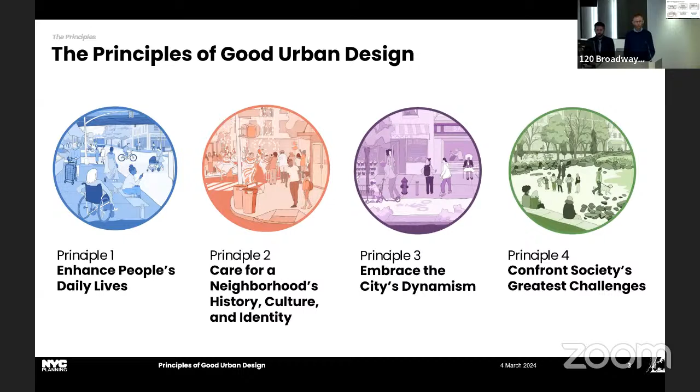Our process took several years and included meeting with community boards, including all 5 borough boards, which helped us spread the word on the interactive website we created, where we heard from over 1,500 New Yorkers from Staten Island to City Island on ways the principles could be better. We had public events like Earth Day to get on the ground, workshops with the AIA, American Institute of Architects, and design and planning professionals to better understand how principles can collectively improve design outcomes, and connected with interagency partners to find synergies among city agencies. We also held a roundtable with developers to understand how good urban design can make more valuable projects.

We heard a lot of great questions from each of you last January, a few of them highlighted here. Most have been addressed with the guidebook, including grounding the principles with specific objectives and real-world examples. Some are spoken to, like the relationship between other codes and regulations, as well as other agency guidelines. And others we'll talk about in our path forward, which speaks to further integration into our processes here at DCP and additional resources for New Yorkers.

Lastly, the primary goals of the Principles Guidebook are to help set expectations that align with a vision for the city, shape better design outcomes through a shared approach, demonstrate how good urban design is more than just aesthetics, and bring more people into the conversation of planning and designing the city. I'll now hand it over to Ryan.

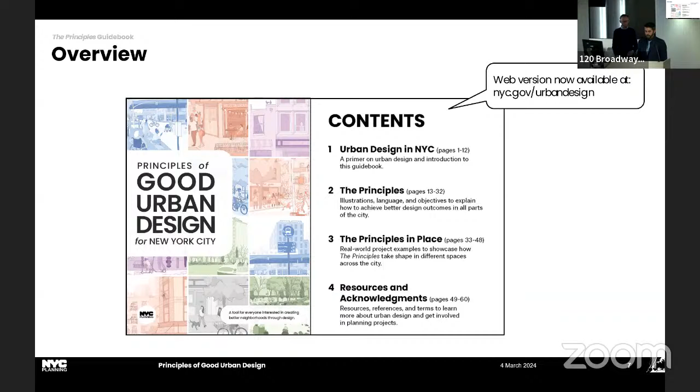We'll take a brief dive into some of the material from the guidebook. Chapter 1 is about justifying the need and use cases for this guidebook. We answer the question, what is urban design in New York City?

Highlighting the importance of thinking about how people experience our city, and how urban design not only supports an attractive city, but a city that is functional and dynamic, a city that feels safe and inclusive.

Urban design requires thinking across a variety of scales. Good urban design not only improves your experience when you're moving down the sidewalk, but it also identifies strategic opportunities for improving economic, social, and environmental conditions at the scale of a block, a neighborhood, the city, and even our region, ensuring that the city is well coordinated, adaptive, and that it performs for our diverse population.

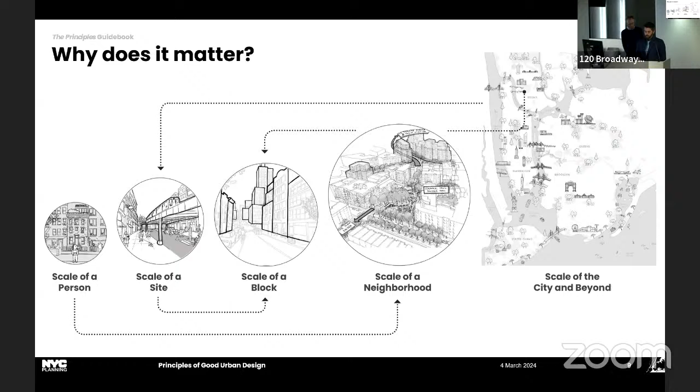The principles of good urban design are a shared set of values and goals to help New Yorkers have constructive conversations about the future of our city. They guide people to think beyond hyperlocal challenges and identify ways that each project can lead to better neighborhoods and a better city. Whether you are a proud resident who attends community board meetings, a parent who wants to shape a better future for your children, or someone who already has experience in planning and design, we hope that this guidebook will have something for you.

The guidebook is a shared tool that can be used in a variety of ways, such as engaging at the local level, or guiding development teams in their design and planning process, or better integrating urban design in our city's policy goals. The guidebook provides actionable goals to help people bring each of these principles to life. We are going to walk through each principle and use an example project to highlight how the objectives play out on the ground. Keep in mind that this is only a Cliff Notes version of what's in the guidebook.

First principle: whether it's a sidewalk that is wide enough for rush hour crowds, storefronts that enliven the street, or a plaza that has comfortable chairs to relax in, details and dimensions impact how people experience the city. Principle 1 is about sharing design strategies that can improve safety, accessibility, comfort, and beauty.

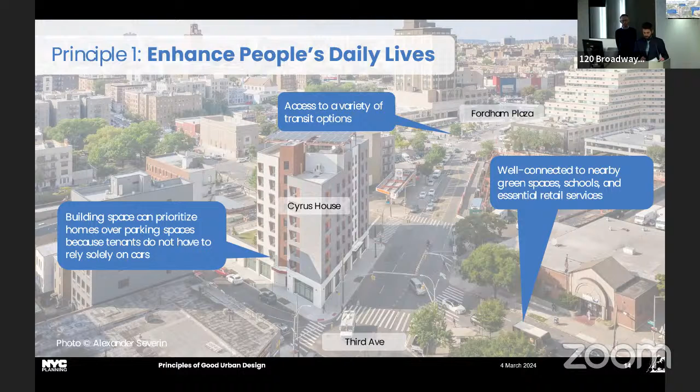On the ground floor of the building, a mix of commercial and residential uses wrap the three frontages. Large storefront windows and multiple building entries make the space feel vibrant and inviting. The building scale is also broken down by changes in height, recessed walls, and a change in materials. These architectural details strengthen neighborhood beauty and promote walkability.

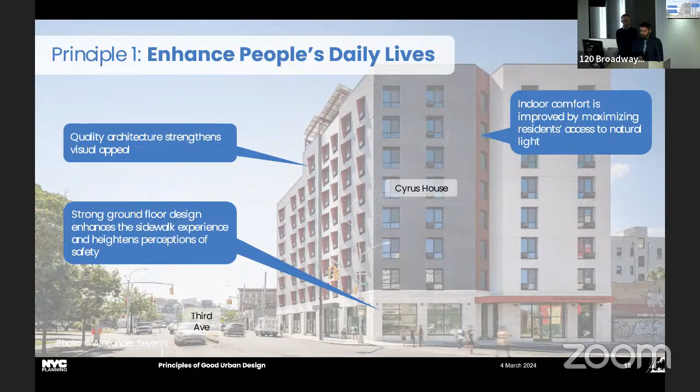Good urban design, like planning, involves a rigorous process of investigation, engagement, and analysis to support thoughtful outcomes. Principle 2 shares actionable goals to strengthen the planning and design process, ensuring that new projects are shaped by the community and informed by existing networks, assets, and identities.

Collaborating with local leaders, from longtime residents and business owners to parents with young children, helps bring clarity to community needs. During hands-on meetings in East New York, Cypress Hills, and Ocean Hill, components of the East New York Neighborhood Plan took shape as community members spoke out about their priorities.

The East New York neighborhood planning process was iterative. Similar to a design process, many interests, ideas, and objectives were shared from a variety of perspectives. Good urban design synthesizes this information by drawing out maps and diagrams to better understand the nuances of neighborhood spaces and their relationship to larger networks.

This drawing was created to visually communicate where there are opportunities so we can involve the right people to identify solutions.

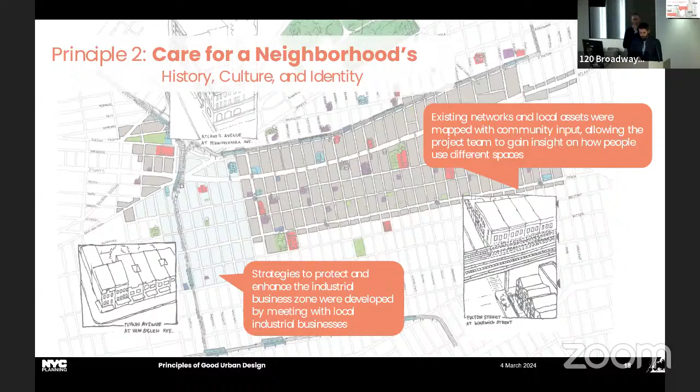Iterative modeling is also a big part of neighborhood planning work. Good urban design analyzes how building form can respond to a site's surroundings, like street width or open space adjacencies. It identifies where public realm improvements are needed to support land use changes, and where land use can help activate the public realm.

New York is a dynamic and vibrant world capital. Good urban design embraces that spirit and rhythm that is characteristic to our neighborhoods. Principle 3 shares objectives for blending old and new, along with ambitions to spark creativity and innovation, and ensure that spaces are designed to celebrate public life.

When developing city-owned land, we have a unique opportunity to shape site programming and design through an extensive outreach process, like the one led by HPD for Sendero Verde in East Harlem. The built outcome includes programming that attracts residents, students, workers of various professions, and visitors, adding energy and new experiences to the neighborhood. The elevated courtyard contains a variety of spaces that diversify East Harlem's public space network.

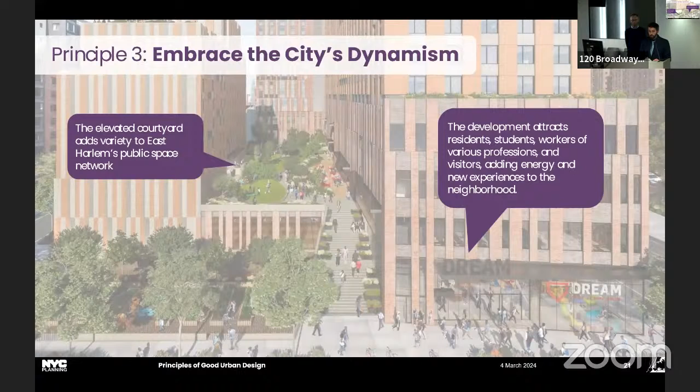The site plan arranged buildings to maximize sunlight within the open space, to reintroduce community gardens, along with flexible open spaces. Community uses and educational facilities are located in the lower floors, which open directly into the plaza space. This activates the public space and provides people with convenient access between indoor and outdoor areas.

Lastly, our city faces many challenges from climate risk to the housing crisis and social inequities. Principle 4 puts forth actions to help each project make progress towards a built environment that is healthy, inclusive, and adaptive, and processes that embrace diversity and facilitate mutual understanding.

Principle 4 cannot necessarily be captured in a single project, but this example along the Gowanus Canal shows how certain objectives come to life. 300 Huntington sets the stage for the kind of development and quality of open space that will be created along the canal. It is unique in that its non-residential use will bring a variety of different people to the waterfront, providing opportunities for social interaction.

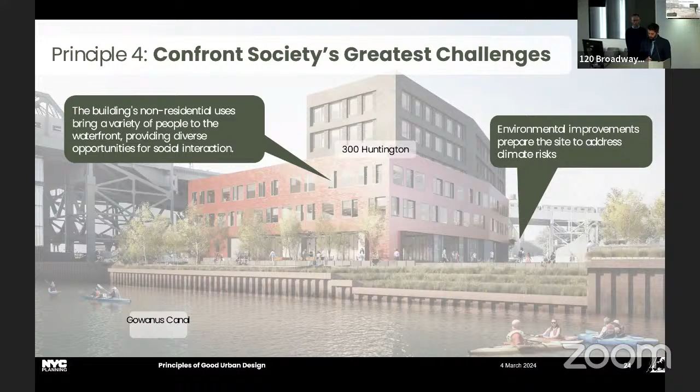The development includes environmental improvements such as site remediation, techniques to capture stormwater, and a dynamic esplanade design that addresses flood risk. Inviting seating areas and a variety of social spaces encourage people to enjoy their time in this public space. They will be surrounded by a diverse array of native and aquatic plants that can thrive in this environment and help restore the canal's local ecosystem.

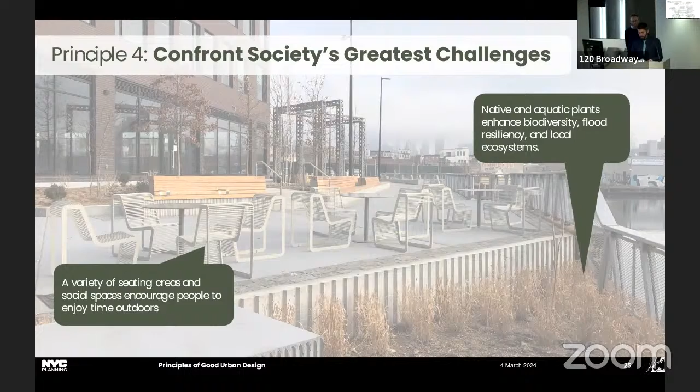The guidebook also includes resources to help people who want to participate in shaping the future of their neighborhood. This example includes questions that a community member could pose when a new development is proposed in their neighborhood. The guidebook includes a step-by-step user guide to help people determine when and how to get involved in various types of planning and design projects.

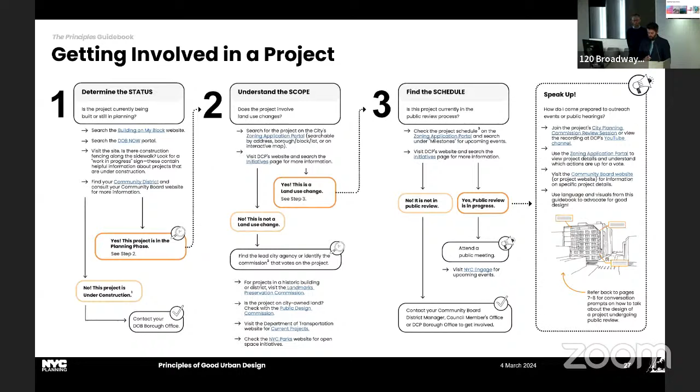And since the principles of good urban design are only a component of delivering quality to all New Yorkers, the guidebook links out to other design resources where people can explore specific topics within the field.

Thank you, Ryan. So, our path forward. Tonight we've got an event at the Center for Architecture, which is sold out. A diverse group of speakers will be there to show how their work exudes these principles.

We'll also be crowdsourcing additional feedback for other case study examples to include, as well as ways in which we might make these principles more actionable and grounded in work.

We envision doing more continuous outreach, of course. We want to be mindful of our community board members and the sheer amount of work that they're reviewing now, but we do think it's important to circle back with them and share this resource, as many of them provided feedback.

We do want to continue to build out a repository and hopefully have more of those online so we can show the diverse ways in which these projects can come to life, and also perhaps highlighting more about the process of making them.

And finally, we think it's important that as we take on a lot of these BLAST initiatives and other ways of refining our processes here and other agencies, we do think it's important to, once that kind of settles in, come back and provide supplemental resources for applicant teams on how design review works at the department. With that, we have finished our presentations and would love to hear your questions and comments.

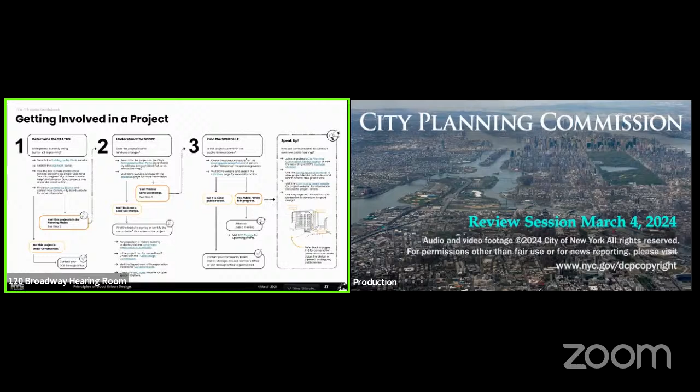We think that the objectives, which we didn't list here, but Ryan highlighted a few of them, but that each principle does give someone much more concrete questions that could be reframed, as we've reframed some of those objectives into questions around different things that might be important for you to push for on a project. So that could be, what uses are being contemplated at the ground floor, how can this development support our community? Are there spaces for community-related uses here? What's the connection to transit? So many different ways that you could connect here.

So I think those are a couple ways that I would, and of course the case studies are also a good way to kind of communicate some of that. Yeah, and just to build off of that, if it is in the context of a neighborhood planning process, I would look at the East New York neighborhood plan, because they really talk through process and where urban design is integrated into the different steps of that planning process.

Great, thank you very much. Let me go to Commissioner Cerullo and then Commissioner Gold. Thank you, Chair. First, I just want to congratulate you and the whole team on this.

It's really, I think, really a very helpful guide. A couple of thoughts just in terms of bringing some of the conversations and experiences that I'm engaged in Midtown that relate, if not specifically in part, to some of what this guidance provides in terms of establishing sort of public realm priorities and sort of the pedestrian experience and good design. And I just wonder your thoughts on this.

So I think that's an ongoing conversation that many agencies need to be a part of. Well, I certainly would be an advocate for the department being engaged in those things, given your expertise, knowledge, and vision. In any conversation that I am in - and there were many - Ting is doing an awesome job trying to put all these pieces together, and I certainly would welcome the opportunity for the department to be engaged in them as well. So thank you.

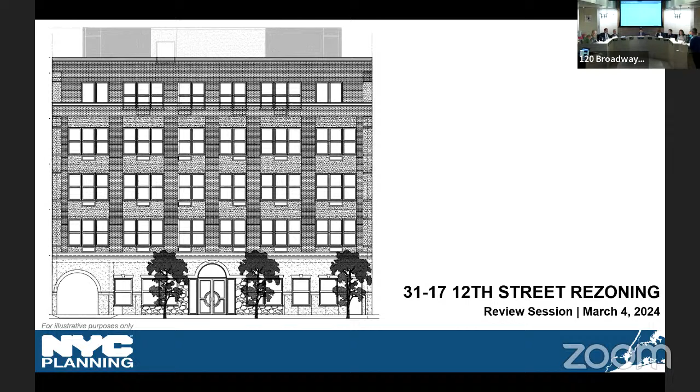The project area is marked here in red and is situated within the old Astoria section of Astoria, just southeast of the Hallett's Peninsula and north of Ravenswood.

The surrounding area is characterized by its mix of scales and uses, ranging from vacant lots and 1-story light industrial buildings to 20-story residential buildings. Building types in the area include 2- and 3-story detached, semi-detached, and attached houses, 4-story residential buildings, a 9-story three-building development known as Astoria West, and a 20-story building known as East River Tower on the block directly west of the project area.

Major wide roads in the area include Vernon Boulevard, 14th Street, 21st Street, and Crescent Street, all of which run north to south, and Broadway and 31st Avenue, which run east to west. 12th Street, where the project area is located, is a 60-foot wide narrow street running in the northbound direction.

Astoria Houses, a NYCHA campus, is located approximately 2 blocks to the northwest of the project area. Ravenswood Houses, another NYCHA campus, as well as North Queensview, a housing co-op, are located approximately 1/2 mile to the south. Recent ULURP applications in the area include Broadway and 11th, which became effective in 2021, 11th and 34th, which was effective in 2022, Hallett's Point became effective in 2013, and Hallett's North effective in 2022, all of which are highlighted pink on this map, and the project area is located within the transit zone.

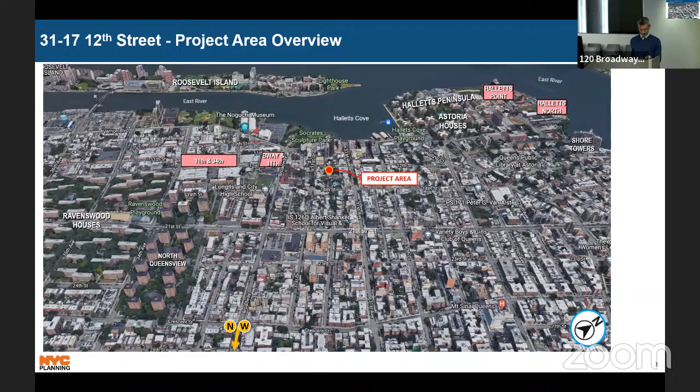The development site is occupied by 5 small 1- and 2-story buildings. One of these buildings is currently a residential building, and the others are used as an accessory garage and commercial space. Most of the non-applicant owned lots are improved with 1- to 3-story, 1- and 2-family semi-detached and attached houses.

There are several community facilities within the surrounding area. The Islamic Unity and Cultural Center and Ideal Islamic School are located directly to the south of the project area. PHS Neighborhood Astoria, a social service organization, is located about 500 feet northeast of the project area. Christian Church of Astoria is roughly 600 feet to the east, and Long Island City High School is located about 1,000 feet southeast of the project area.

Public open spaces include Astoria Health Playground, Socrates Sculpture Park, Hallett's Cove Beach, and Rainey Park. Bus service to the surrounding area is provided by Q69 and Q100 along 21st Street, the Q103 along Vernon Boulevard, and Q104 along Broadway. The nearest subway stations are located at Broadway, as well as 30th Avenue stations located along the N and W lines, both of which are approximately 7 blocks east of 12th Street. There are also several Citi Bike stations located along Vernon, 14th Street, as well as adjacent to LIC High School.

As seen here, the immediate surrounding area is characterized by a mix of land uses, including industrial manufacturing, residential, and public facility uses. Industrial uses are located mostly to the north, south, and west of the project area, while mixed commercial and residential uses are mostly mapped to the north and east of the project area.

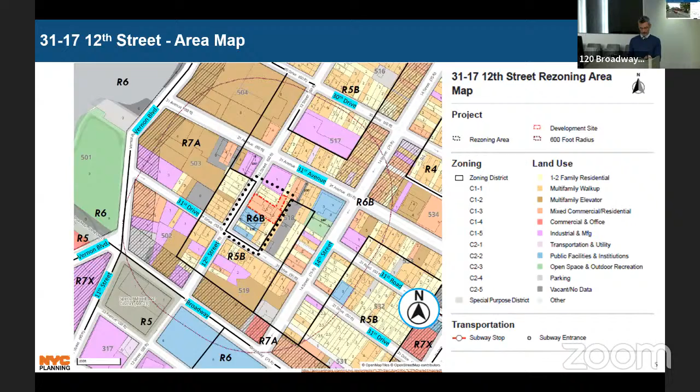This view faces west along 31st Avenue at the intersection with 12th Street. To the right, we can see the development known as Astoria West, completed earlier this year. To the left, we can see the 20-story East River Tower, completed in 2009.

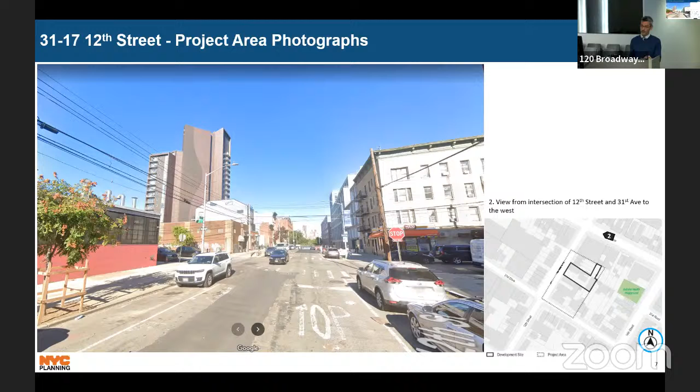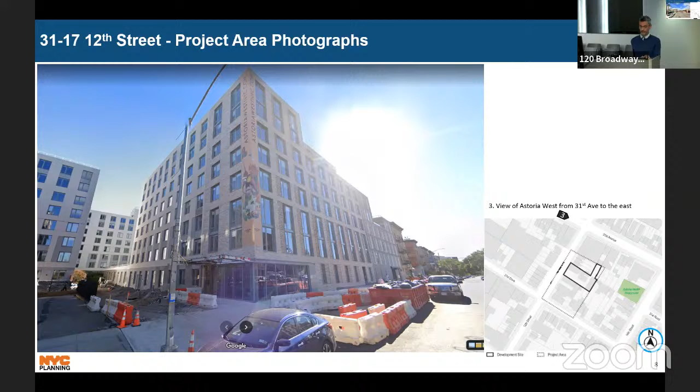The proposed rezoning would facilitate the development of a new 5-story residential building containing 35 dwelling units and approximately 26,500 square feet of floor area with an FAR of 2.2, the maximum permitted for R6B districts under MIH. The proposed development will have 9 income-restricted dwelling units pursuant to MIH Option 1.

The proposed development will have a 4-story, 43-foot-high street wall with the 5th floor set back 15 feet from the street line, and in total the building height will reach 53 feet.

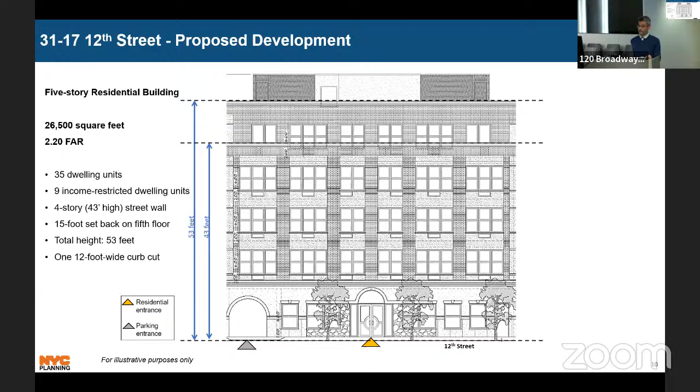There will be 15 open accessory parking spaces located at the rear of the development and 18 enclosed bicycle parking spaces in the cellar, accessible via a new 12-foot wide curb cut along 12th Street. The approximately 1,700 square foot dogleg located at the northeastern portion of the development site will be kept as open space.

To facilitate the proposed development, the applicant proposes a zoning map amendment from an existing R5B zoning district to an R6B zoning district, which will increase the maximum allowable residential FAR from 1.35 to 2.2.

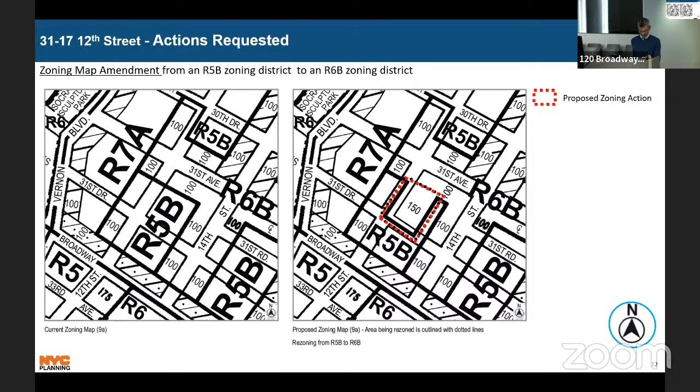R6B districts are contextual districts typically developed with 4- and 5-story attached multifamily buildings with a maximum base height of 45 feet and a maximum building height of 55 feet, and a maximum floor area ratio of 2.2 in conjunction with IH, or with MIH, and required accessory parking of 50% of all dwelling units.

The applicant also proposes a zoning text amendment to map MIH Option 1, which will require 25% of the residential floor area to be permanently affordable at an average of 60% AMI, with no dwelling unit at more than 130% of AMI.

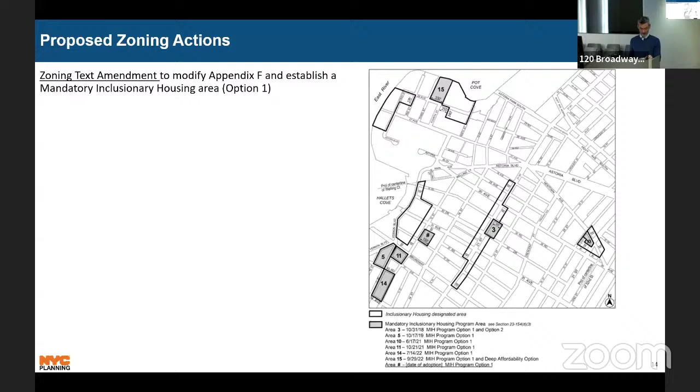In conclusion, this is a private application for a zoning map amendment from an R5B to an R6B zoning district and related zoning text amendment to map MIH Option 1. These actions would facilitate the development of an approximately 26,500 square foot, 5-story residential building containing 35 dwelling units, including 9 income restricted units, at 31-17 12th Street in the neighborhood of Astoria, Queens, Community District 1.

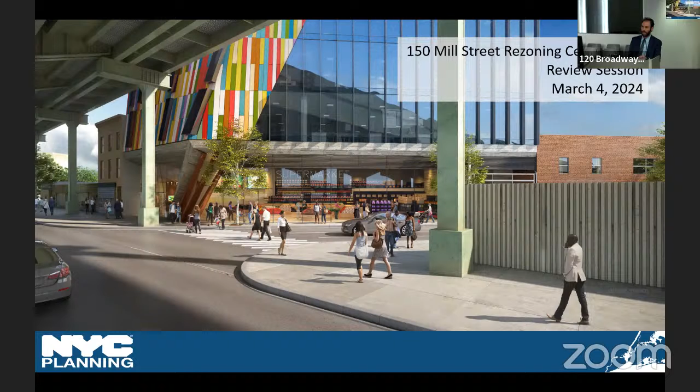The project before you is a rezoning application at 150 Mill Street. This item will be certified today. The applicant for this project is BP Mill Street LLC. This is located in the Red Hook neighborhood of Community District 6 in Brooklyn, also located in Council District 38, the district of Council Member Alexa Aviles. The applicant is proposing a zoning map amendment from an M1-1 district to an M1-5 district.

The action will facilitate a 10-story, approximately 64,000 square foot development with retail use proposed as a supermarket at the ground floor and cellar level, community facility uses at the second and third floors, and office uses above. No parking is proposed as part of the development, as none is required.

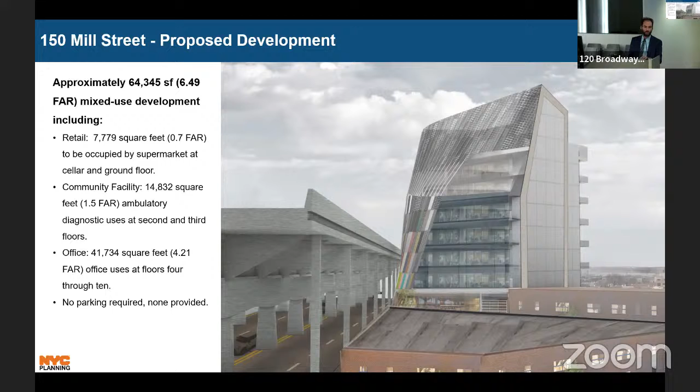Here's a closer image showing not only the land uses, but the zoning in the area as well. While this is an area with significant industrial uses surrounding, they're predominantly located to the south of the project area, which you can see in purple here.

Directly to the west of the project area are the Red Hook NYCHA houses, as well as several community facility uses shown in blue. The houses in the surrounding area are predominantly zoned R5.

Further, just across the Gowanus Expressway is Carroll Gardens, a neighborhood which includes mostly residential uses, with Court Street being a local commercial street. Zoning districts in this area are generally R6B, with Court Street designated as R6A with a C2-4 commercial overlay. To the south are additional M1-1 districts, as well as some M3-1 districts closer to the canal, which you can see in the bottom right-hand corner of the screen.

On this image, you can also see the significant difference in the lot sizes. As you move from south to north towards the project area, the larger lots of the industrial area are replaced with smaller lots, which we tend to find in predominantly more residential areas.

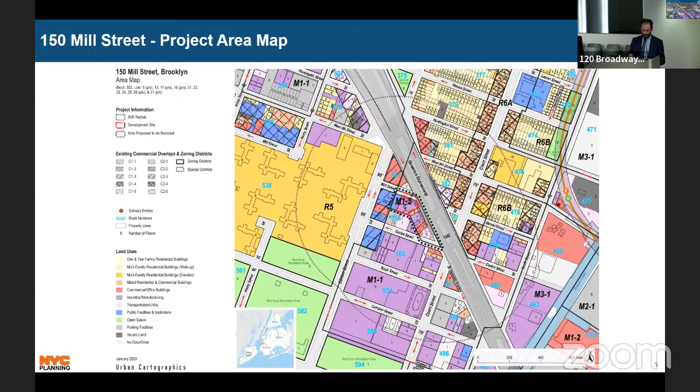This here is an aerial image of the neighborhood with the project area shown in yellow. Land uses in the area include residential and mixed-use buildings to the north and west, and industrial uses south and east towards the Gowanus Canal. The subject block itself includes several institutions that I'll go into detail about a bit later.

As for open space, the Bush Clinton Playground and the Red Hook Pool, which is part of the much larger Red Hook recreational area, are located about two blocks southwest of the project area.

The area is located in the transit zone and is well served by public transit, with two bus routes serving the area. The B57 bus runs from Gowanus to Maspeth, and the B61 bus runs from Red Hook to Park Slope. The Smith and 9th Street station, serving the F and G lines, is located approximately three blocks northeast of the project area. Additionally, there are four Citi Bike stations within two blocks of the project area, and bike lanes can be found on Mill Street, 9th Street, Court Street, and Clinton Street.

The project area is just within the northern boundary of the Southwest Industrial Business Zone, or IBZ, which is shown here shaded in purple.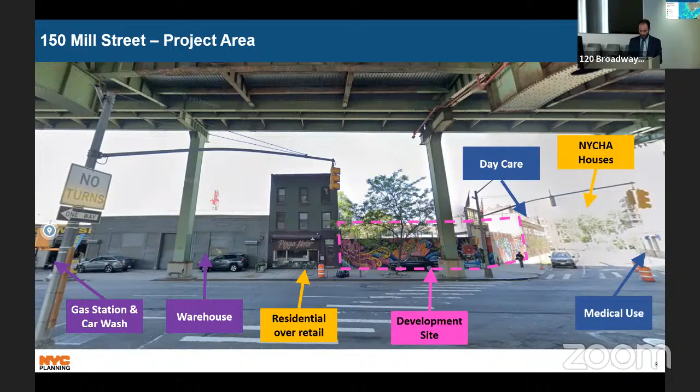Here I'll go into some more images of the project area. This is an image of Mill Street looking east towards the Gowanus Expressway, with the project area shown on the right underlined in yellow and the development site underlined in purple.

That brick building you see just cut off on the right side is within the project area slightly. That is the aforementioned daycare, a portion of which will remain in the project area; however, it is not proposed to be redeveloped.

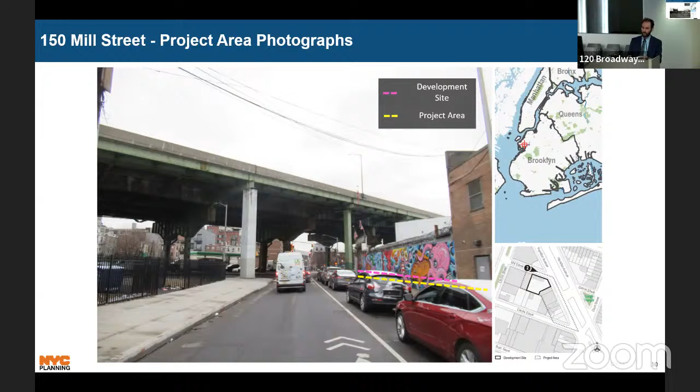This is a direct view of the project area from underneath the expressway, with the project area underlined in yellow and the development site in pink. While the project area shows the daycare, that brick building to the right is not proposed to be redeveloped, but it is within the project area.

This is a photo of the project area facing west. You can see the development site in pink and the project area, which includes the adjacent residential building and the restaurant at the left side of your screen, underlined in yellow.

Here's one more photo of the project area facing west. Again, you could see where the development site specifically ends, that fence there with the painting on it, directly adjacent to the residential and retail building.

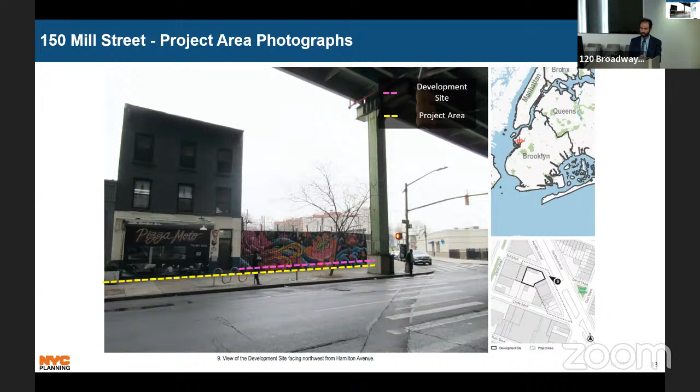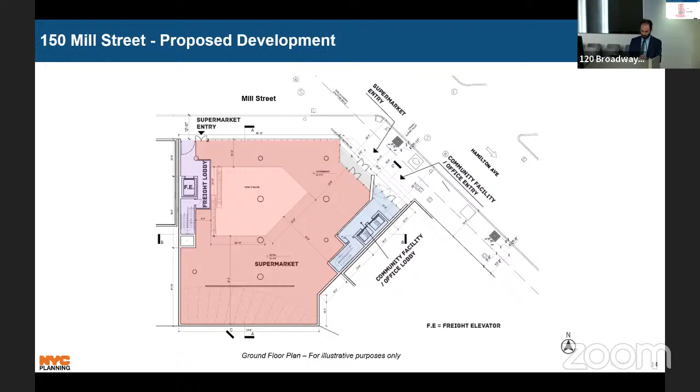The applicant is requesting a rezoning from an M1-1 district to an M1-5 district. M1-1 districts permit manufacturing and commercial uses at an FAR of 1.0, with parking required at a rate of 1 space per 300 square feet of floor area. M1-5 districts permit manufacturing and commercial uses at an FAR of 5.0, with no parking requirements. Neither district permits residential uses.

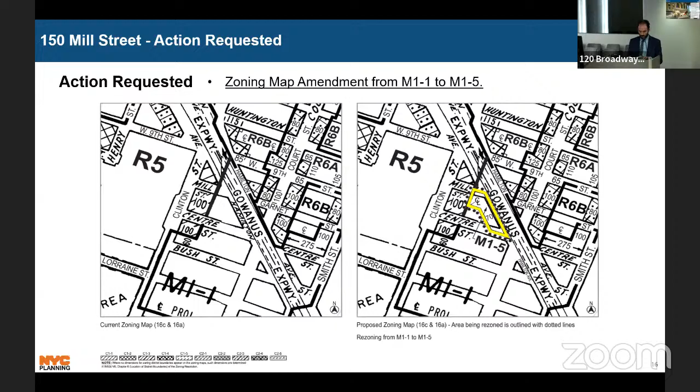In summary, the applicant is requesting a zoning map amendment from an M1-1 to an M1-5 district. The actions will facilitate a 10-story, 64,000 square foot development, which will include retail uses proposed as a supermarket at the ground floor and cellar level, community facility uses at the second and third levels, and office uses above. Again, no parking is proposed as none is required for the proposed development.

This concludes my presentation. I'll be happy to answer any questions you may have. Great, thank you, David.

So this change from M1-1 to M1-5, you just noted the differences on FAR and on parking. The site is, I think you described it as a bit of an irregular shaped site. Is that correct? It is, yeah. I'll see if I can get back to a better image showing that. That's an image there, so you could see the site outlined in pink on my computer upstairs, but let's call it purple here.

Okay, and right now you have a mix of uses, right? It's at the end of an IBZ, but you have a little bit of a mix. You have lots of residential right nearby. You have the Red Hook houses, post office, daycare next door. Is that right? Yes, it's definitely a mix of uses, and this is in contrast to what you may find a couple blocks south, where some of those larger lots are. And there is a residential building right next door to this, is that right? That's correct.

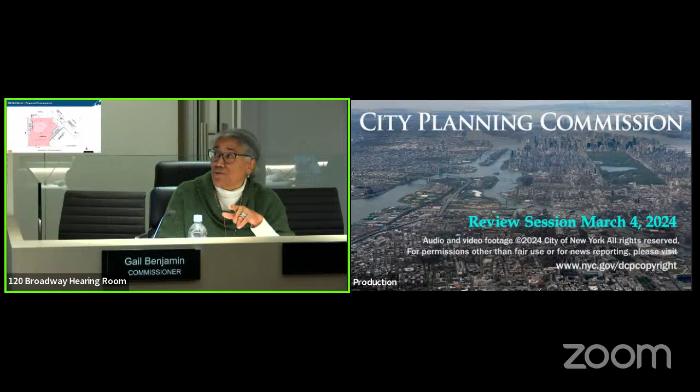I was going to give my assumption based on eyeballing some of the dimensions, but I don't want to speak out of turn. I don't think there's enough room for them to front in and front out onto the street. So I'm assuming they either front in and back up across the sidewalk, or they don't ever go there and somehow they're loading over the sidewalk while parked on Mill Street. But I'd like to understand that.

I'd be happy to request a circulation plan for loading and unloading from the applicant.

And is there a loading area for the office space? I didn't see it on the plans. My understanding is that might be that freight lobby you see there as well. That's not the supermarket lobby, the freight lobby? I'm actually not sure, I would need to get a little more detail from the applicant and from the development team. That's it for me, thank you.

Thank you, Commissioner. I'll follow up. Thank you. Commissioner Crowell? Yeah, I have a couple of questions.

Some of them build on what we just discussed. I'm concerned about, I understand parking is not required, but what type of office space will that be? I'm very familiar with the area, it's a tight fit for a building this size. Understandably, parking in offices, I don't understand exactly how

this new population is going to both be transported there, despite the fact that there is public transportation, which I think is inconsistent in terms of being proximate to the subway, but it still is a major barrier to cross under the BQE and Hamilton Avenue. That is a very heavily trafficked corridor and a very dangerous corridor.

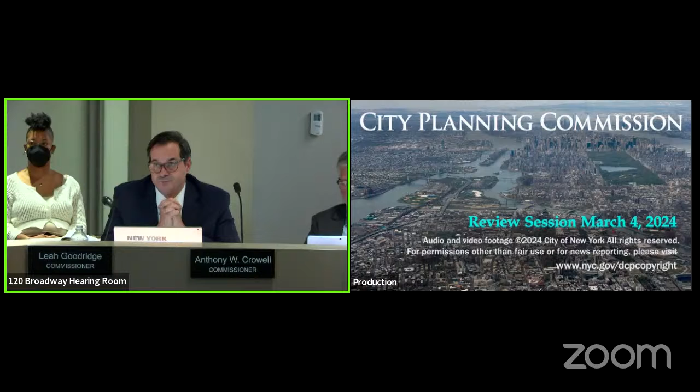We understand that public transportation can be a bit scattered, it could be difficult crossing from the G and F subway line. That said, in reviewing the application proposed to us, they haven't gone into a ton of detail about the office spaces proposed. I think the applicant was spending more time confirming the community facility and the retail uses below. So I can get more detail about who they're thinking about or what kind of specific uses they're considering for those office spaces.

The concern is noted, though. I think in general in this area, parking is difficult, of course, and it is an unfortunate area to traverse underneath the expressway. That said, we have spoken to DOT as well as the state DOT, so they're working on some infrastructure improvements to try to at least make it a little less unsafe. But to return to the initial issue, the concern about parking is noted. We'll be sure to communicate this to the applicant, make sure they have a solid rationale for why parking is not proposed to be included here.

You know how many lanes the street is? I didn't get a chance to go there over the weekend, but my recollection is it's not a wide street there. Mill Street? Yeah, oh yeah, I've got that here somewhere. Not there, not there. It really did, I promise you. It might have been, oh there it is, 50 feet. Yeah, so it is not a wide street. Correct, so it's a really tight fit there.

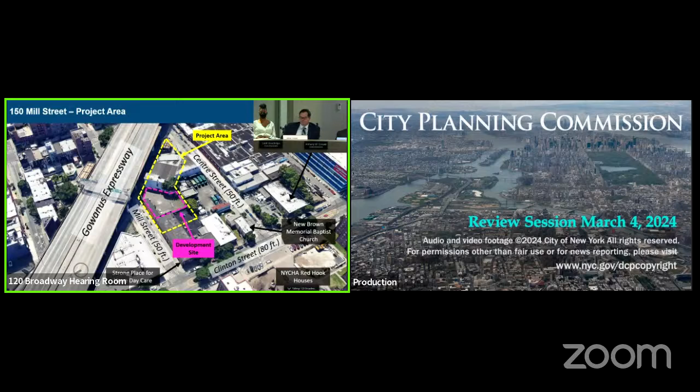Thank you, Chair, thanks for the presentation. A couple comments. One is I appreciate the clarification you made about the project site being outside of the 1% floodplain. But when you look at the projections, this will be, as soon as 2050, within the 1%. So just in general, it would be interesting to understand, and this is more of a question for when we see this again, what type of provisions will be in place to secure the uses that could potentially be inundated.

But in addition to that, my concern is really the way we're thinking about this as compared to an MX. I appreciate the comments about the proximity of this site to other commercial and residential uses, but we could say the same thing about the uses to the south. With the city just announcing such an important milestone in terms of green jobs in this area, and the proximity to existing industrial uses, why not consider at least some mix with light industrial? I'm wondering how that conversation happened and what the rationale is for not zoning for mixed industrial-commercial, or something closer to an MX. It strikes me that within an IBZ in this part of the city, we're not even considering that.

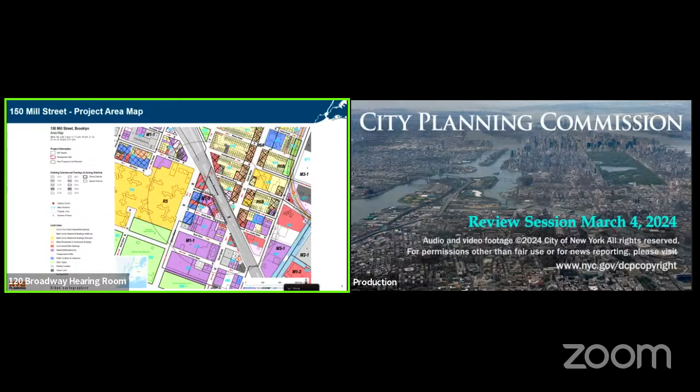So would you say, and I don't recall when this designation was made, but have we been successful in attracting industrial businesses into the IBZ there?

We're actually going to take a look at IBZs broadly. Based on the recent city council legislation, we're going to be looking at all industrial areas and the changes that have been happening in them. I think we're going to do that holistically, so instead of comparing one-off IBZs, we can look at them, what's been going on and changing broadly. So that's actually work that we're undertaking currently.

So the short answer is I don't have the numbers for this specific IBZ, but we're actually undertaking that work now. Okay, thank you. Yeah, okay, thank you very much.

This item is... Commissioner Osorio, thank you Chair. Under the wire, go ahead. Thank you, I appreciate it. I don't mean to derail us, but a quick follow-up.

To the research that is about to have to be carried out, we don't have that information on site. I'm shocked to hear that, for example, something like the recent M district discussion, even associated with City of Yes for Economic Opportunity, would have done that. We haven't done that. Well, we have information certainly about the IBZs as a whole, but when it comes to specific numbers, those are things we don't want to speak out of turn on.

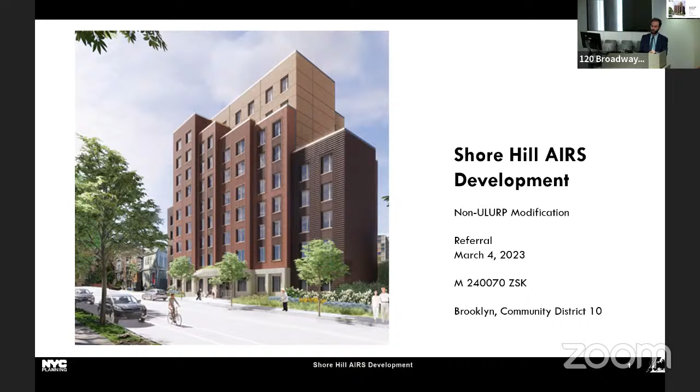Good afternoon, I hope you're still having a good afternoon. This here is not a certification, in fact, but actually a referral of a non-ULURP modification to facilitate the construction of affordable homes for seniors in the Bay Ridge neighborhood. The applicant is RAHF IV Shore Hill LLC. This, again, is a non-ULURP modification to an existing large-scale residential development, or LSRD. The proposed development itself is a 9-story, approximately 85,000 square foot building, which is to house 137 AIRS units.

AIRS units, of course, are affordable independent residences for seniors. And the proposal also includes significant improvements to landscaping and open space designs throughout the campus, which I'll go into more detail about in a bit.

Here we can see the project location. It's at approximately 9000 Shore Road in Community District 10 in the Bay Ridge neighborhood. This is located in Community District 10 in Council District 47, which is the district of Council Member Justin Brannan.

Here we can see the site in the neighborhood. The site is predominantly zoned R7A, with a small portion of the site zoned within an R3-1 district. Around the area, you can see predominantly low-density residential uses to the northeast, Shore Park and Parkway to the west, and additional medium-density development along Shore Road to the south in those R7A districts that you can see on the bottom of the image here.

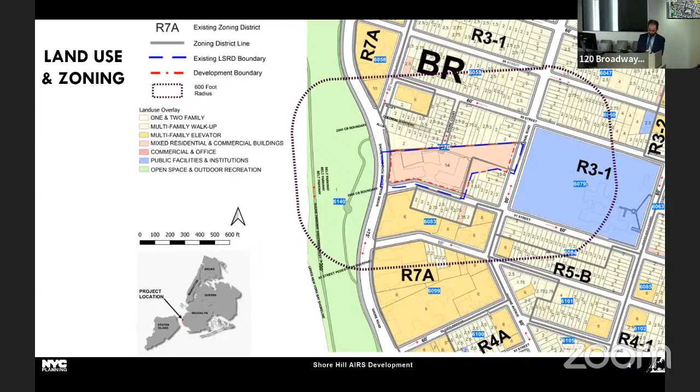This here is a closer image of the LSRD boundary in an aerial. You could see the boundary outlined in yellow. This is bounded by Shore Road on the west, Colonial Road on the east, and 91st Street to the south. Colonial Road, on which the proposed building will have frontage, is 80 feet wide.

Directly across the street is a religious institution, Sister of the Visitation of Brooklyn, which includes Visitation Academy. You can see a significant amount of open space on that campus as well.

As noted, the project is directly adjacent to Shore Park and Parkway, which includes ball fields, playgrounds, seating areas, and running and bike paths. In terms of public transportation, the B16 bus, which provides access to Prospect Park and Prospect Lefferts Gardens, has a stop directly adjacent to the campus on Shore Road. The X27 and X37 buses, providing access to Midtown Manhattan, also have stops directly adjacent to the campus on Shore Road. The 86th Street station, which serves the R train, is located about a half-mile northeast of the project area.

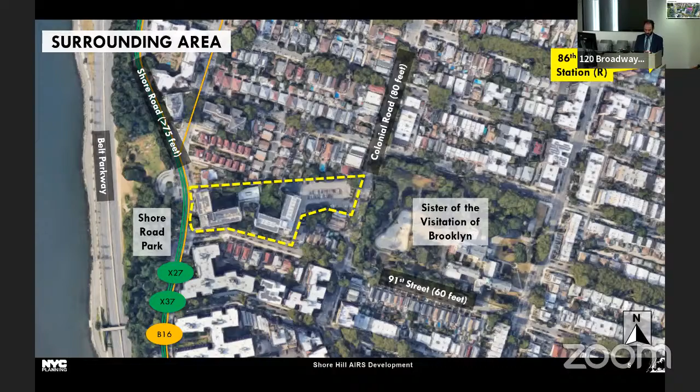Here I'd like to show a few images of the project site. This is an image of the existing parking lot from across Colonial Road, which is, again, 80 feet wide. This is a reminder that directly across the street from the project site, so essentially the area from which this photo is being taken, is the campus of the Sister of the Visitation of Brooklyn.

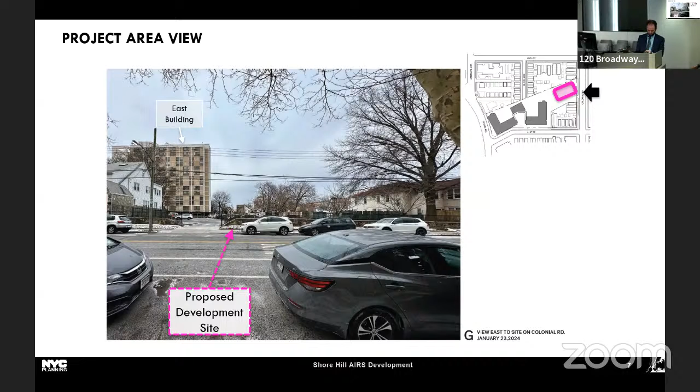This is essentially the opposite image. This is a photo of the parking lot from inside the project area facing east. So you can see that this is approximately where the proposed building will be constructed. This is a photo of the two existing buildings on the campus facing northwest from 91st Street. The area in which the proposed development will be built is not really visible in this photo, but this does show kind of the campus as it exists today.

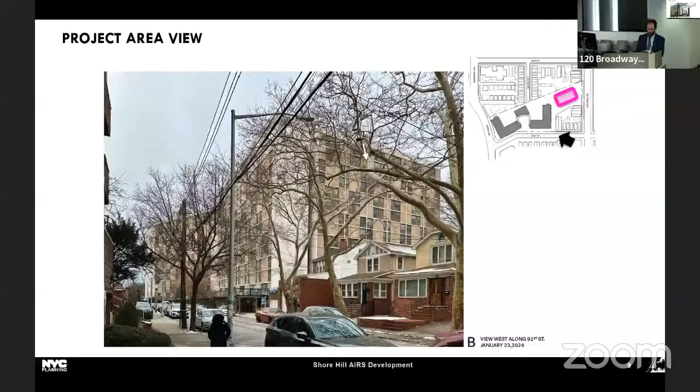The proposed development, again, will be a 9-story, approximately 85,000 square foot building, proposing 137 units, as well as improved landscaping and open space designs. This image shows a rendering of the proposal looking southwest along Colonial Road.

This modification to the existing LSRD is determined to be a non-ULURP modification, as opposed to a major modification, because no additional waivers are required for the proposed development. I'll go into detail about what that means on the next few slides.

All right, so a little bit of history. In 1974, the City Planning Commission, as well as the Board of Estimate, approved an LSRD for the development of two 14-story buildings and the community center, both of which still exist, and both of which you just saw images of, and they're proposed to remain. When originally developed, the property was actually fully located within an R7-1 zoning district. When approved, there were waivers approved as part of the LSRD for certain R7-1 regulations regarding rear yard, height and setback, and required distance between buildings, specifically those three waivers.

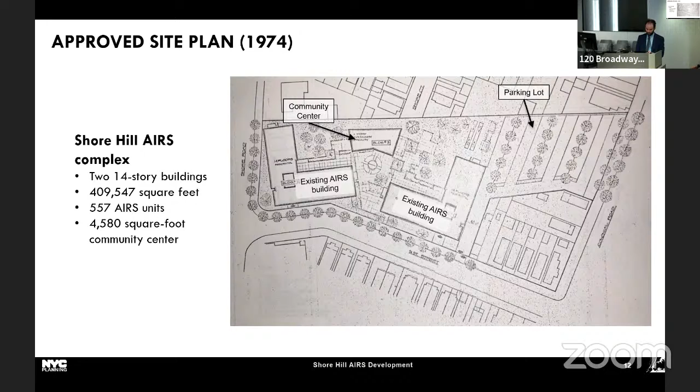In 1978, a small portion of the LSRD campus, which is just to the south of the proposed development area, was rezoned to R3-1, and that's why there's a small part of the campus site that is zoned to R3-1. But in 2005, the remainder of the project area and the vast majority of the property was rezoned to R7A as a part of the Bay Ridge rezoning. Again, that was in 2005.

This image shows a general proposed site plan with the proposed development outlined in pink. Now, as stated, the original approval included those three waivers that I noted, waivers of regulations regarding rear yard, height and setback, and required distance between buildings.

The proposed development here outlined in pink complies with all applicable zoning requirements as they exist today. No additional waivers are necessary or being sought here. And therefore, this is determined to be a non-ULURP modification. So really what this is doing is modifying the site plan to accurately reflect what the new conditions will be. But again, the proposed development outlined in pink here does comply with all applicable zoning regulations as they exist today.

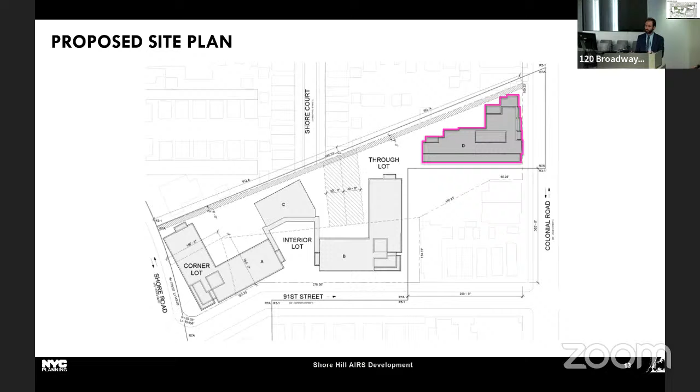This shows the proposal in much more detail. The new residential building, outlined here in pink, will be built on the existing parking lot. 57 spaces are proposed to still be provided on the site, simply relocated. The existing residential buildings, as well as the community center, are to remain.

I'd like to go into a little bit of detail about the overall campus improvements, particularly to the public areas. The courtyards shown here are proposed to be improved and would include landscaped areas and a range of seating types, including ADA accessible seating for use by the residents.

The new building would create a street wall presence along Colonial Road. The site perimeter would include planted buffers, and overall site circulation is proposed to be improved with clear paths and delineation between vehicles and pedestrians to improve safety. Paving strategies akin to shared streets, which we found successful elsewhere, would be incorporated in certain areas for enhanced safety.

A little bit more detail here. ZR Section 78-312 permits the City Planning Commission to grant waivers of certain zoning regulations in accordance with a large-scale residential development. In 1974, it received three waivers: rear yard, height and setback, and regulations regarding required distance between buildings. As noted, no additional waivers are required.

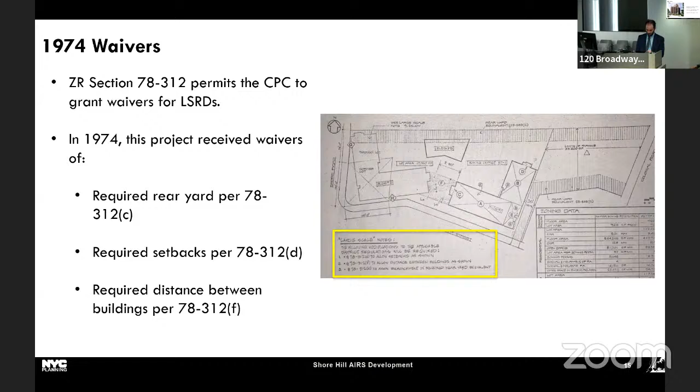Now, this proposal also required a Board of Standards and Appeals action, right? So in 2016, as part of the Zoning for Quality and Affordability Text Amendment, or ZQA, ZR Section 73-434 was introduced. This section allows the BSA to permit the reduction of off-street parking required for income-restricted housing, so long as the board is able to make the necessary findings outlined in that section.

The applicant was granted approval of this application by the BSA on August 7th, 2023. This application represents the first utilization of this new ZR section that was introduced in 2016. As such, while 112 parking spaces were originally approved as part of the LSRD, the requirement, thanks to the BSA action, is now being reduced to 56.

And the applicant, to my understanding, proposes 57 parking spaces, so one more there. Would like to note that the original LSRD noted the provision of 112 parking spaces. Only 73 were built and 73 exist today.

It's our conclusion that a lower number of parking spaces were provided, as the provision of 112 spaces would result in an unsafe and inefficient layout for the campus.

It's also important to note that these are parking spaces for the existing development, the two existing AIRS buildings. No parking is required for the new development, as the zoning resolution permits applicants to waive all parking if 15 or fewer spaces are required. Only 14 spaces are required here through the calculations, so the reduction in parking is only for the existing building.

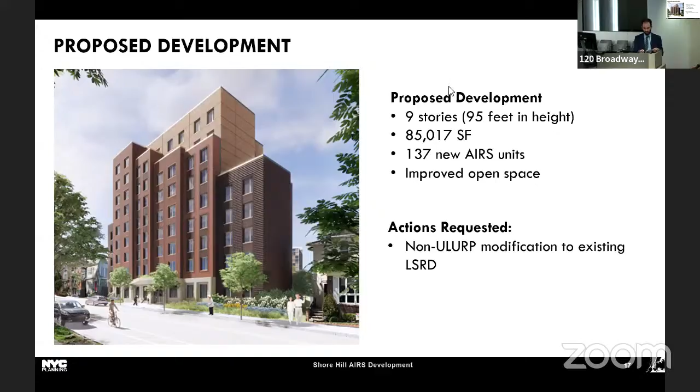Okay, there's both a lot going on here, but also not that much that is actually pending before the commission. Is that a fair statement? That's a great summary. Okay, so I think it's an interesting proposal and mostly a ministerial question here. But let me see if there are questions or clarifications or anything.

Vice Chair Knuckles: Yeah, despite my few months on the commission, I still don't understand why did they go to BSA rather than CPC for the parking reduction?

Well, they needed to do both in some order, basically. The BSA action allowed them to reduce the parking requirement for the existing building so long as that actual physical geographical parking area is replaced with another AIRS building. Right, so it's specifically for this action.

If they were to come here simply to modify the site plan, it would still not be legitimate because the modification to the parking for the existing buildings, we could have memorialized it on the updated site plan, but it wouldn't actually have been legal because they still would have had the higher number of required parking spaces. So the BSA action allows them to reduce the number of parking spaces.

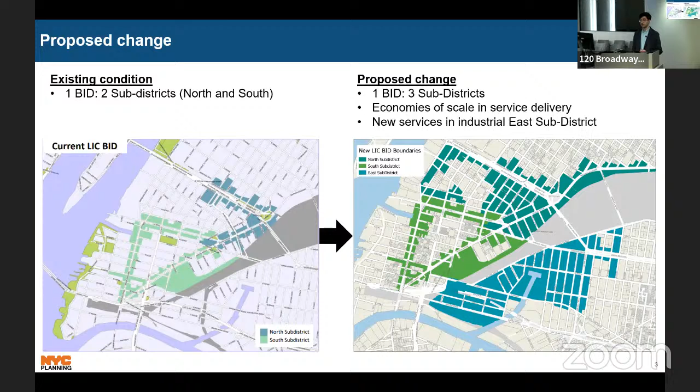The funding primarily comes from an assessment in the north and south sub-districts on Class A and B commercial and mixed-use properties, assessed based on assessed value of the building and the full square footage. In the east sub-district, Class A properties will be assessed based on the square footage, with 50% of the total assessments in the east sub-district being paid by the 20 largest buildings.

Throughout the bid, in all 3 sub-districts, residential lots will once again be assessed at $1 per year, and government and not-for-profit owned properties will not have an assessment.

The median assessment of the north and south sub-districts would be $620 and $443 respectively. The median assessment for the east sub-district would be just over $3,000, and the median for all 3 sub-districts is $701 per year.

In public review, statements of support for the bid show 72% and 64% of assessed value of properties in the east and west expansion areas, respectively, support the proposal. Community Board 1 has submitted a recommendation to approve the expansion. We have not yet received a recommendation from Community Board 2; their public hearing is on March 7th.

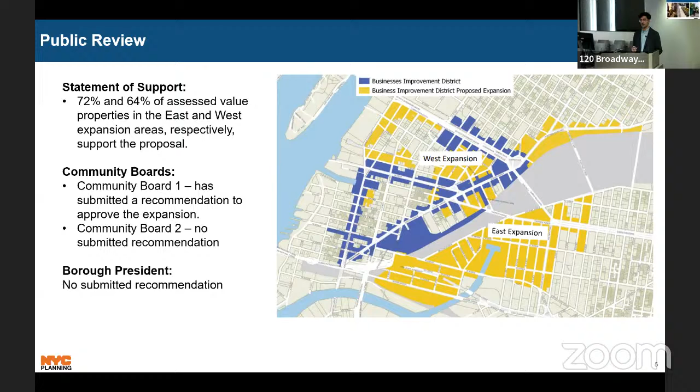Thank you. I think most of my questions I can pose to SBS on Wednesday. But one of them, and you may know the answer already, otherwise we'll punt till Wednesday, is whether there are other bids which have these sorts of subset parts with a north, south, east, west sort of thing. I guess there may be.

So, all right, give it a whirl and then we'll ask the bid on the commission. Go ahead. Yes, there are other districts, other bids with sub-districts. I can't say how many have a breakdown like that, but there are some that have that kind of setup. Go ahead, Commissioner, tell me what I need to know.

It's a great question. I don't know how many others myself, but in the Grand Central, the original district, which was created in '88, was then amended in 1992, which added the southern portion of Fifth Avenue and up north on Park Avenue. Those are called the amended areas. We're not calling them sub-districts or whatever the terminology is now, but there's a different assessment rate in those parts, based upon what was negotiated, what the community wanted there and what they didn't want. At this point everybody has everything, but in the growing part of the district, that's how it was done. It was two different pieces, so I have a bifurcated assessment process.

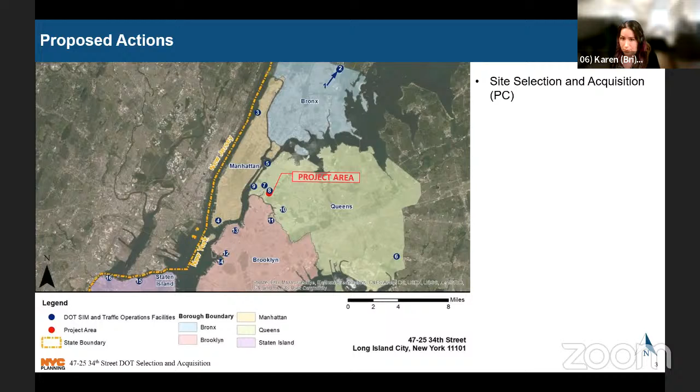On February 1st of this year, Queens Community Board 2 voted 28 in favor, 0 against, and 2 abstaining, recommending approval. On that same day, the Queens Borough President held a public hearing for this application, and on February 16th, the Queens Borough President recommended approval of this application. With this, I conclude my presentation, and I'll take any questions you may have. Thank you, great, thank you.

Commissioner Osorio? Thank you, Chair, thanks so much for the presentation. Just a quick follow-up, I remember that when we certified this, there was a conversation about existing industrial businesses on site. I remember there was a pending clarification, or a confirmation, in terms of how many industrial businesses are there right now, and whether or not there's a plan to relocate them, or what is generally speaking the plan. Correct.

So today we're going to be talking about the Melrose Concourse Neighborhood Construction Program, the second NCP that I've brought to you now in the past couple weeks.

The applicant, which is HPD, the Department of Housing Preservation and Development, requests an Urban Development Action Area project, UDAA designation, project approval, disposition of city-owned property, and an acquisition to facilitate the construction and development of 3 new residential buildings with a total of approximately 71 affordable housing units plus 1 superintendent unit.

23 of the 71 affordable units will be designated as affordable independent residences for seniors, also known as AIRS units, and 8 of the 71 affordable units will be set aside for formerly homeless individuals.

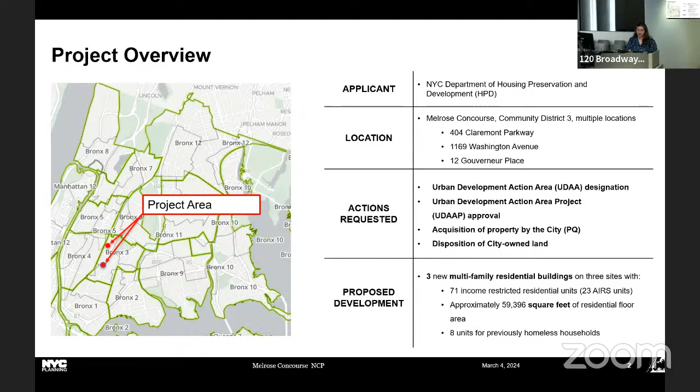The proposed developments will be situated on the following sites: 404 Claremont Parkway, 1169 Washington Avenue, and 12 Gouverneur Place. These sites are within the Claremont and Morrisania neighborhoods in Bronx Community District 3.

The area surrounding Development Site 1 is characterized largely by public institutions, industrial and manufacturing uses, as well as many residential multifamily buildings, parks, and open space.

Prevalent uses in the surrounding area around Development Sites 2 and 3 are mixed and include industrial and manufacturing, public facilities, residential uses, and mixed residential and commercial buildings, as well as commercial and office buildings. There are also several privately owned vacant lots within the area, some of which are used as parking lots.

As you can see on this map, there are many open and recreational spaces in the project area, including the 37-acre Claremont Park, the 125-acre Crotona Park, and many smaller parks and playgrounds scattered about. Noteworthy public facilities and institutions in the area include several houses of worship, a dialysis center, and many schools.

The project area is well served by public transit. The B and D subway lines are located close to the development sites, with the 170th Street stop closest to Development Site 1 and the 167th Street stop closest to Development Sites 2 and 3. The 4 subway line generally runs parallel to the BD line in this area and is located 2 blocks west of the BD subway line.

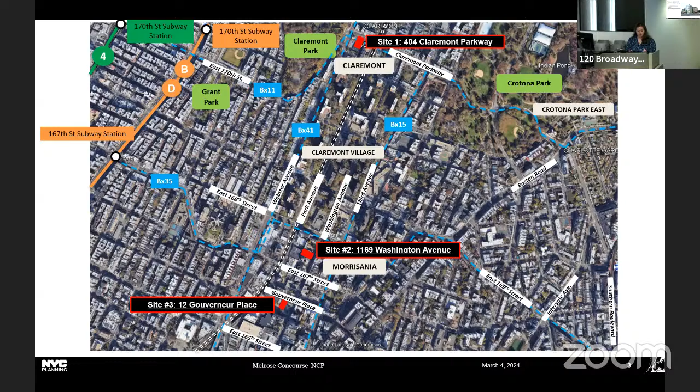404 Claremont Parkway, the proposed development site for Site 1, is a new 4-story building containing approximately 8 units of affordable housing and approximately 6,400 square feet of residential floor area with a mix of 1- and 2-bedroom units. The proposed unit breakdown includes 2 1-bedroom units and 6 2-bedroom units. The proposed building will include a rear yard, rooftop terrace, and an on-site laundry room.

1169 Washington Avenue, the proposed development for Site 2, is a new 9-story building containing approximately 34 units of affordable housing with approximately 28,000 square feet of residential floor area. HPD intends to set aside 12 of the 34 affordable dwelling units for AIRS, and 8 of the units in the building will be reserved for formerly homeless. The proposed unit breakdown for this site includes 12 studios, 14 1-bedroom units, and 8 2-bedroom units. The proposed building will include approximately 1,300 square feet of landscaped rear yard, bicycle storage, on-site laundry room, and approximately 400 square feet of office space for the residents.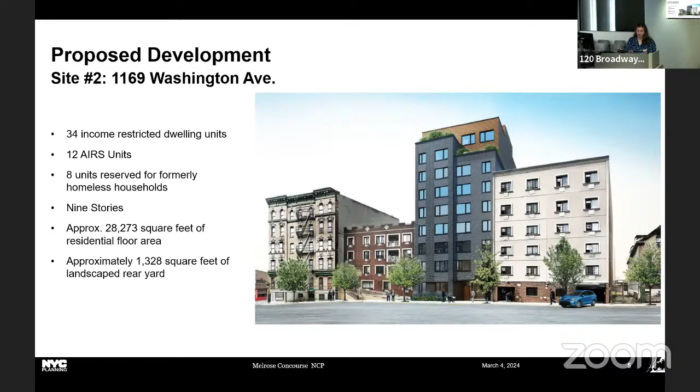12 Governor Place, the proposed development site for Development 3, is a new 9-story building containing approximately 30 units of affordable housing with 24,000 square feet of residential floor area. HPD intends to set aside 11 of the 30 affordable units for AIRS, and the proposed unit breakdown for this building includes 7 studios, 16 1-bedroom units, and 6 2-bedroom units. One of these 2-bedroom units will be dedicated to the super.

And the proposed building will include about 1,600 square feet of open space for residents. The Commission certified this project on November 27th, 2023, and on January 23rd, CB3 held a public hearing and submitted a favorable recommendation on January 28th. The vote was 14 in favor, 5 against, and 7 abstained.

The Bronx Borough President held a public hearing for the project on February 6th and voted in favor with modifications. The CPC public hearing is scheduled for March 6th.

Just like the Borough President called out on the East Tremont Cluster NCP recommendations, the Borough President expressed concern over unit sizes, particularly the small size of the studios. BP recommends that HPD count units based on the number of bedrooms provided, a note that was also in the last NCP recommendation. And the BP urged applicants to consider combining studios to create larger unit sizes to support a wider range of families, particularly in development sites 2 and 3.

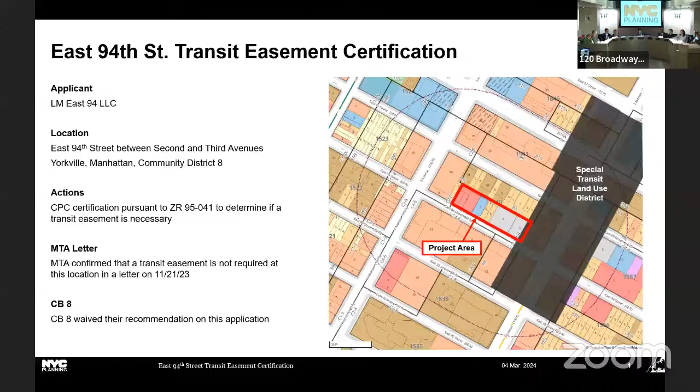Okay. The 9th item on our agenda is a City Council modification scope determination for the 230 Kent Avenue rezoning in Brooklyn Community District 1. Our presenter is Lucia Marquez-Reagan.

Hi there. Welcome. Hello. Hello, Chair Garodnick and Commissioners. 230 Kent is returning before you for a City Council modification scope determination. 230 Kent Avenue was certified by the City Planning Commission on August 21st, 2023, and voted on by the Commission on December 13th, 2023.

The proposed actions are a zoning map amendment from an M1-4 to an M1-4/R7X, also an MX-8 district, and a zoning text amendment to amend Section 123-63 of the zoning resolution to add R7X as a residential pairing for an MX-8 district, and to Appendix F to map MIH coterminous with the project area.

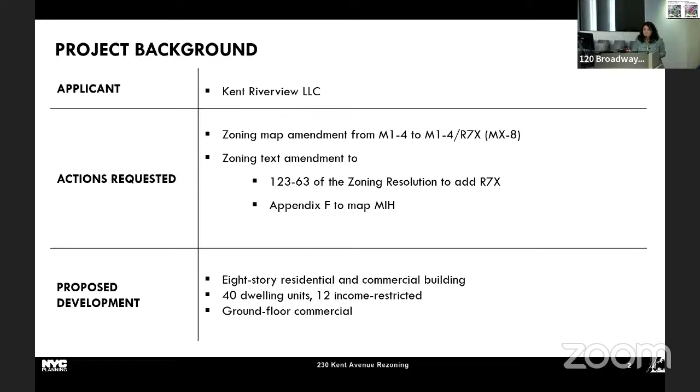These actions are to facilitate the development of a new 8-story residential and commercial building with 40 dwelling units, 12 of which would be income restricted, with approximately 3,300 square feet of ground floor commercial in the Williamsburg neighborhood of Brooklyn, Community District 1. The City Council is proposing modification to the project area boundaries.

The application, as proposed by the applicant, is to rezone the entirety of Block 2362, approximately 18,400 square feet, bounded by North 1st Street to the south, River Street to the west, Metropolitan Avenue to the north, and Kent Avenue to the east, from an M1-4 to an M1-4/R7X, MX-8 mixed-use district.

The City Council modification is to reduce the project area by about 70%, or approximately 12,500 square feet, to an area bounded by a line 120 feet southwesterly of Metropolitan Avenue, bounded by Kent Avenue, North 1st Street, and River Street. The area removed from the project area is currently in an M1-4 district and would remain so under the City Council modification. An M1-4 district does not allow residential uses.

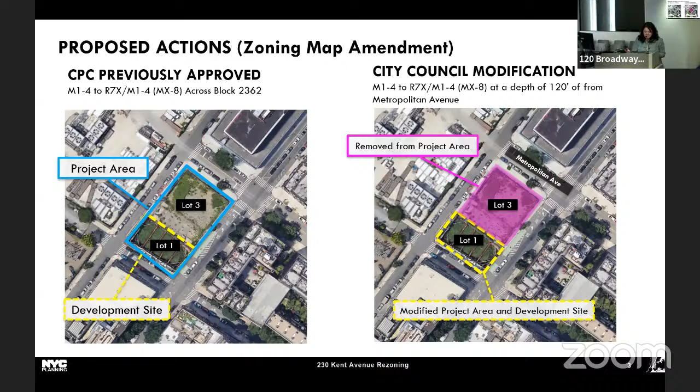The City Council modification also alters the proposed MIH map to be coterminous with the project area boundary, reduced down to the development site, and mapping only MIH option 1. The lot removed from the project area, lot 3, which is currently vacant and has been since 2018, was a projected development site listed in the environmental assessment statement, with the potential to create, under MIH option 2, 82 units, 25 income restricted with the mapped MIH area. Residential uses are currently not allowed under an M1-4 district, and upon removal of the lot will continue to not be allowed under this district.

This concludes my presentation, and I'm happy to take any questions. Great, thank you. Any questions here?

Rationale, if any? The question is, does the council express any rationale to their making these amendments? I don't believe so. Other questions? What district is it in? This is in Community District 1. You mean council district? Yeah. Restler, Councilman Restler.

Okay, so we have a scope determination question. I think there's very little question here. This one is in scope, at least from the department, so the commission gets to make that call. I'd like to seek assent by voice vote to send a letter to the council stating the modifications here are within scope. All those in favor, please say aye. Aye. Opposed, nay. Okay, the ayes have it. Thank you.

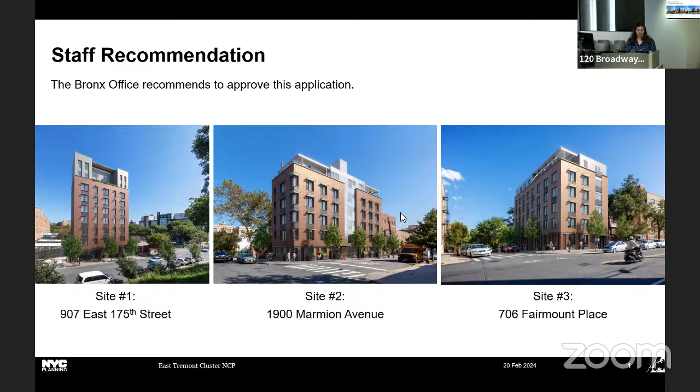Okay. Also, staff have prepared reports for 396-400 Avenue X rezoning, which we had a public hearing for on the 7th of February, and we had a staff recommendation at the last public review session. Regarding 341 10th Street rezoning and LSGD special permits, in your weekend materials was a letter from the applicants, and Emily Bachman is here to present.

Thank you. Hello, Emily. Hello, Chair Garodnick and Commissioners. I will get started while the presentation comes up. This is the post-hearing follow-up and staff recommendation for 341 10th Street, a private application from Stellar 341 LLC for a zoning map amendment, zoning text amendment, and special permits in the Park Slope neighborhood of Brooklyn Community District 6. This application was certified on October 2nd of last year. The public hearing was held on January 24th, and the vote is scheduled for this coming Wednesday, March 6th.

The department supports this application, which would facilitate the development of 305 residential units, 162 of which are proposed to be income restricted. The proposed R7-3 and R7-3 C2-4 zones and accompanying special permits will allow uses and bulk that are consistent with the mixed-use character of the neighborhood and that are appropriate given the site's adjacency to wide streets, access to transit and services, and proximity to other higher density districts. These actions will also bring the existing building into compliance while allowing for flexible design of infill development that activates underutilized portions of the lot, improves the development's relationship to the street, and provides much-needed housing, neighborhood services, community facility amenities, and open space to current and future residents.

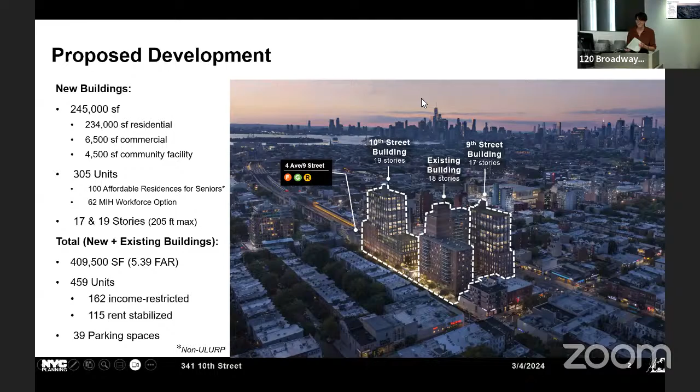Thanks, Emily. Okay, staff have also prepared reports for 3011 12th Street rezoning, 2301 Steinway Street rezoning, and Willets Point Phase 2. For Willets Point Phase 2, there was a memo in your weekend materials along with testimonies. Also for consideration on Wednesday is Fort Totten Electrical Infrastructure SNAD, which is 2 SNAD authorizations in Queens Community District 7. Also 27 Wetmore, which is a special hillsides authorization in Staten Island Community District 1. Staff have prepared a report for 900 South Avenue, Staten Island Community Board 2 office space, which had a public hearing at the February 21st public meeting.

Oliver Vega is here to present a department recommendation on Zoom.

Good afternoon, Commissioners and Chair Garodnick. Can you hear me? The Department of City Planning staff supports the applicant's proposal to acquire approximately 1,063 square feet of office space on the 3rd floor of a 4-story building at 900 South Avenue for Staten Island's Community Board 2, CB2, through a 195 Notice of Intent to Acquire Office Space of the New York City Charter. The acquisition is appropriate because CB2's district office has been located at 900 South Avenue for the past 5 years since November 2018. The site meets all fair share criteria and has been adequately meeting the community board's needs. DCAS is seeking a long-term lease on behalf of CB2 to secure its occupancy in place. A CPC report reflecting the recommendation has been prepared for the commission. Thank you.

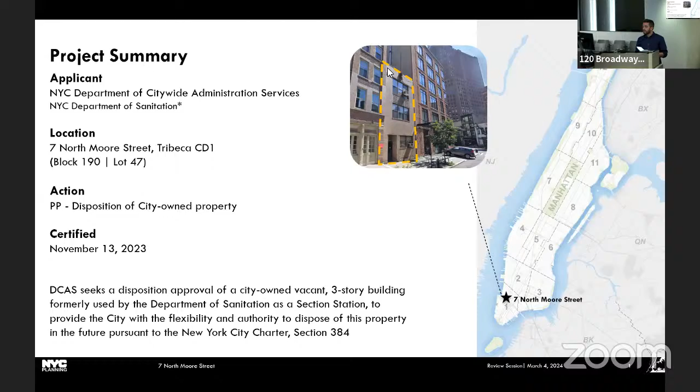Next, we have 15-21 West 124th Street, which had a public hearing at the February 7th public meeting. Trevor is presenting this item as well.

Thank you, sir. This private application, a proposed text amendment to the zoning resolution, which would allow an otherwise as-of-right residential development located at 15-21 West 124th Street to waive required parking, is scheduled to be voted on March 20th. The public hearing took place on Wednesday, February 7th. At the public hearing, Vice Chair Knuckles requested additional information on potential impacts on the neighboring Harlem Library, which the applicant detailed in a follow-up memo.

Department staff recommend the proposed text amendment, which would make the more liberal parking regulations of R7-2 districts applicable to 3 unique R6A districts within the special 125th Street district. These modified requirements would make accessory off-street parking requirements for the applicant's 33-unit residential development such that they may be reduced altogether. Although off-street parking is not required for residential developments in the Manhattan core, defined as encompassing community districts 1 through 8, parking requirements still apply in Upper Manhattan.

Department staff believe that existing parking requirements do not adequately reflect the broad array of public transit options in that geography. Furthermore, the proposed zoning text aligns with the broader direction of city policy, as seen in the City of Yes for Housing Opportunity proposal, in which the elimination of parking requirements is being contemplated for new residential developments or enlargements citywide to further the city's housing objectives.

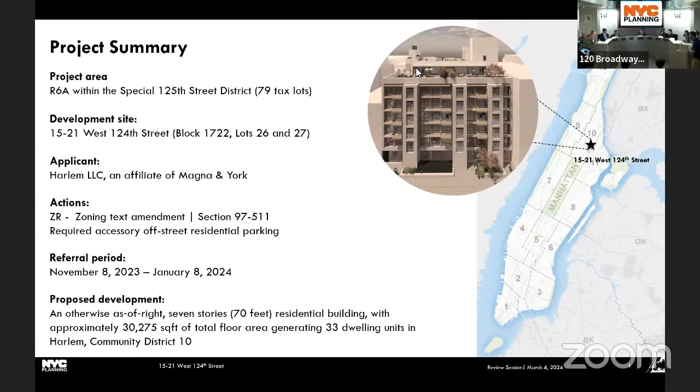Great. Thank you. Okay, next we have 281-311 Marcus Garvey Boulevard, which had a public hearing at the February 21st public meeting. There was a letter from the applicants in your weekend materials. We are joined by Jonah Rogoff to present.

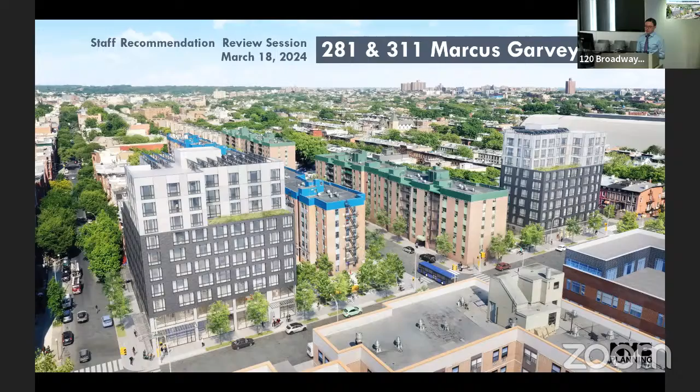The department recommends approval of this application, which would facilitate the development of 155 dwelling units, all of which are proposed to be income restricted, along with ground floor commercial and community facility space. The department believes that the proposed R7A C2-4 zoning district and accompanying special permits are appropriate given the location along a north-south corridor of Marcus Garvey Boulevard, as well as the proximity to public transit and services and alignment with other mid-density zoning districts nearby.

Further, these actions will help facilitate a project that provides much-needed affordable housing. Again, the developer is agreeing to an ELLA term sheet and has been in discussion with HPD, as well as active ground floor uses and publicly accessible open space, as well as improvements to open space that's private in the development.

Regarding the special permit for the large-scale general development, the department believes that this action is appropriate and results in a superior site plan with a building envelope that remains contextual and consistent with zoning districts mapped elsewhere in the neighborhood, as well as helps codify on-site open space, landscaped courtyards, and widened sidewalks that improve the development's relationship with both nearby buildings and also with the street.

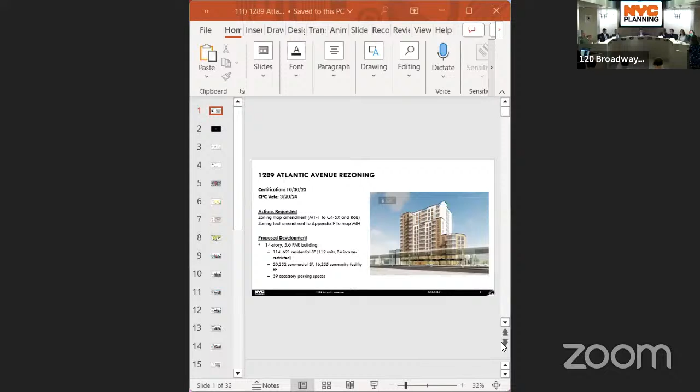This application is called 1289 Atlantic Avenue rezoning. It was certified on October 30th, 2023. It had its public hearing on February 21st, 2024, and will be voted on March 20th, 2024. The department supports the proposed actions, which consist of a zoning map amendment to change the project area from M1-1 to C4-5X and R6B districts, which would involve eliminating manufacturing zoning on the subject block, and the related zoning text amendment to Appendix F to map an MIH area coterminous with the project area.

The department believes the proposed C4-5X district is appropriate here, given the unusual depth of the block, the corner location, the proximity to transit, including the Nostrand Avenue Long Island Railroad, which is directly adjacent, and the A and C trains two blocks north on Fulton Street, the extensive frontage along Atlantic Avenue, and the proximity to the Atlantic Avenue Mixed-Use Plan project area, and consistency with the AMUP framework.

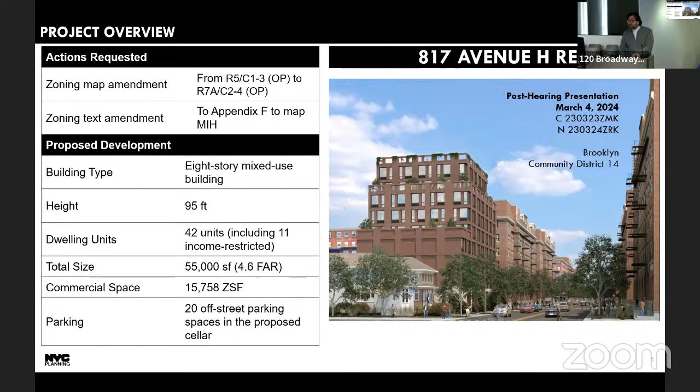Regarding 41 Richard Street, which had a public hearing at the February 21st public meeting, Emily will join us at the next review session on March 18th to do a department recommendation. But if there are any questions for now, please let us know.

Next, we have CEQR Type II rule change, the CAPA Green Fast Track. I'll note this will be laid over from the report section for this Wednesday. In your weekend materials was a memo and testimonies. Alexandra Moskowitz is here to present. Hi, Alex. Hi, everyone. Nice to see you again.

Today I'll give you an update on the Green Fast Track for Housing rulemaking. The public comment period has now closed. We're going to review the feedback that we received to date since we last came before the commission. The proposal will come before you for a vote on the 20th of this month, after which the rule would be published again. We are planning for an effective date at the beginning of June, which would allow for all agencies to be on the same timeline for implementation.

First, we wanted to respond to questions from the commission regarding the process for Type 2 eligibility determination. We have proposed thresholds pertaining to the size of a project, along with standard checks of certain site conditions and necessary commitments. With this set of criteria, all categories of potential impacts for small and medium-sized housing developments could be avoided without the need for additional review of a proposal's density characteristics.